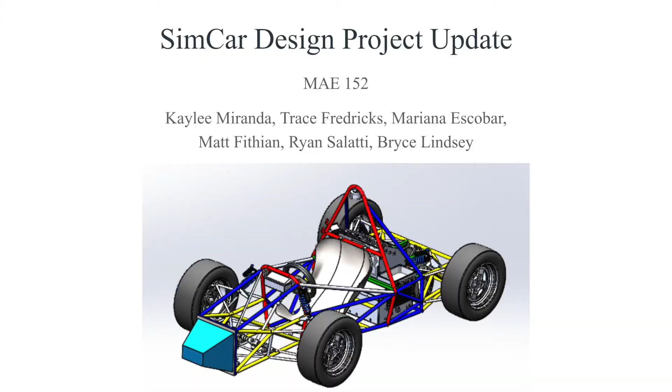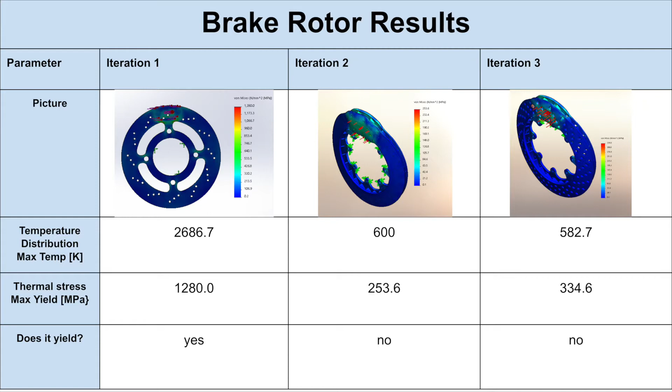The impact attenuator is mounted on the front of the car to absorb energy in the event of a collision. For the purposes of a race car, we want the attenuator to yield for large decelerations above 3 Gs, but not for small ones, all while being as light as possible. It is mounted with a strong adhesive to a plate that has a much higher stiffness, and so will be modeled with a fixed geometry on the mounting face.

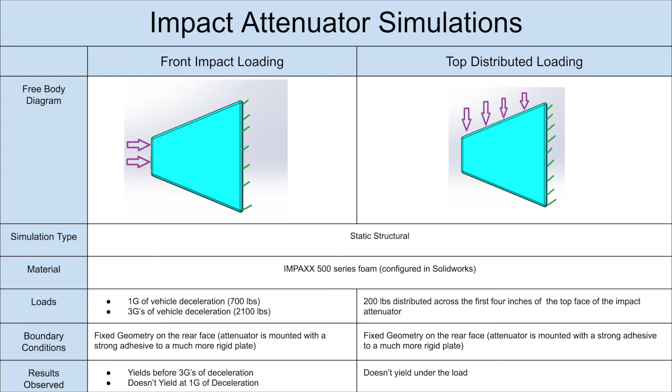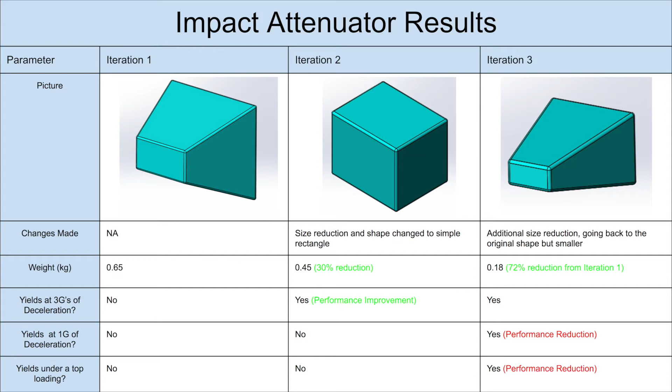The first iteration was overbuilt, meeting the performance requirements, but was heavier than needed. Our second iteration reduced weight by 30% while still performing as needed, but upon removing more weight, we saw that the impact attenuator would yield under too little acceleration.

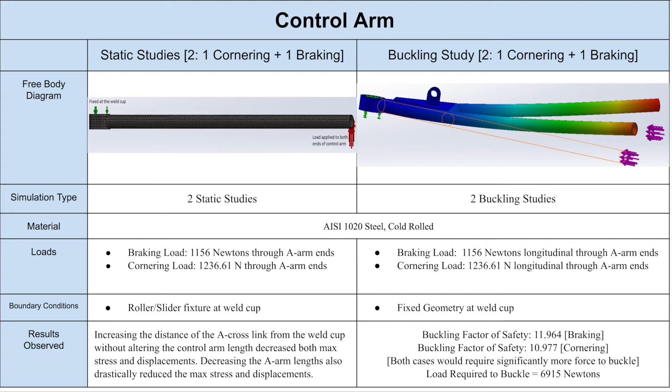The control arm is designed to connect each wheel to the chassis of the car. Control arms are used to transfer the force exerted on the wheels into the shocks to smoothen the ride and keep all 4 wheels on the ground. There were a total of 4 simulations conducted, 2 static studies and 2 buckling studies. The simulations were designed to mimic the effects of both braking and cornering on the lower front control arms.

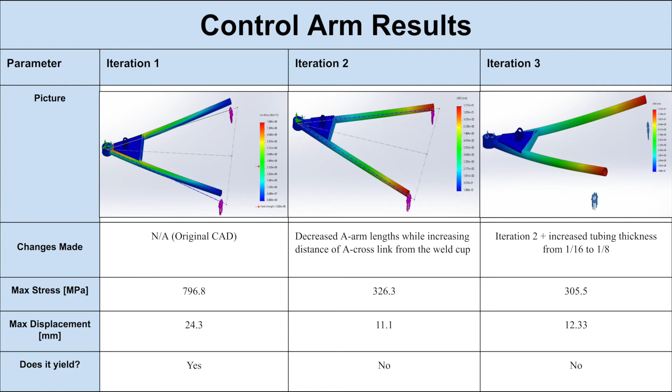The material is AISI 1020 cold rolled steel that will transfer longitudinal forces from the road, cornering forces generated when undergoing a turn, and vertical forces from suspending the chassis in the air through both the shock and the tire.

The chassis is the main structure of the vehicle. This part is heavily triangulated, which helps to direct forces toward the nodes, which are welded meetings of steel tubing with very high strength. The intent of this design was to reduce stress built up throughout the chassis. I ran several simulations to determine optimal locations for added triangulating members. This also helped me make a change to the material.

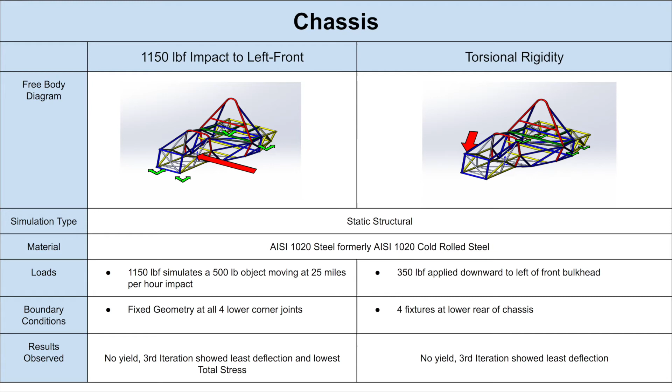The presented cases show an 1150 pound force, which models a 500 pound object impacting the chassis at 25 miles per hour. The first iteration yielded when considering axial and bending stress. The second iteration included 3 new triangulated members, which drastically reduced axial and bending stress buildup and deflection. The third adds 1 more member that further reduces stress and deflection, as well as a material change that showed improved results.

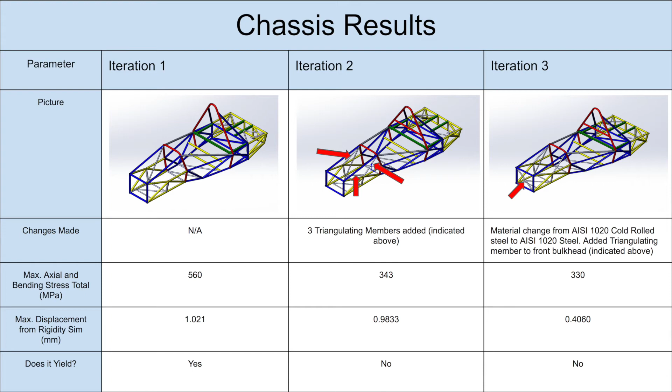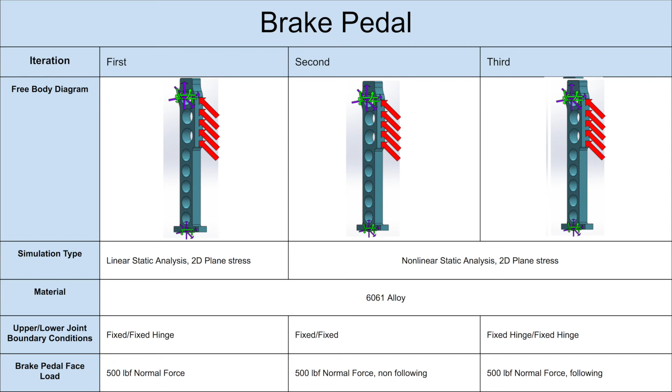The brake pedal translates force applied by the driver into hydraulic pressure generated by the master cylinders. In an emergency stop, a maximum normal force of 500 pounds is applied to the fully extended pedal. This is modeled as being rigidly fixed at both ends with applied load in between. The pedal is a thin model, loaded and restrained in plane, and can be modeled with 2D simplification plane stress elements. A nonlinear static analysis will result in the most representative analysis, as the fixed pedal stiffness may increase as it is deformed. The first iteration does not yield and has an FOS of 1.98.

To reduce weight, the diameters of the material cutouts were increased by 37.5%. This resulted in a 23.5% decrease in weight, but a FOS of 0.752. To account for these discrepancies, the cutouts were increased by 20% and were slotted. This resulted in a 28% decrease in weight and a FOS of 1.17.

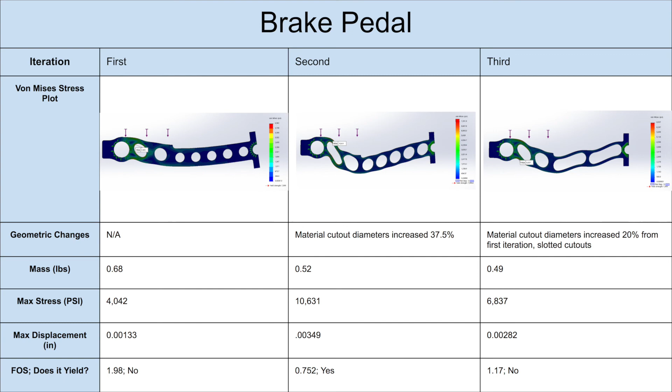The chassis tabs are used to attach various components to the car. For these simulations, I am focusing on the tabs that mount the battery box. This load is approximated as a 110 pound force. I loaded the tab in 2 different ways, with the force parallel to the face of the tab and normal to the face of the tab. The normal force was more significant.

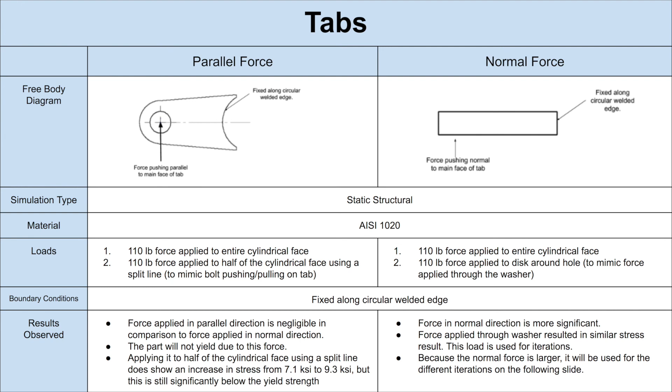For the normal force, the first iteration yielded. For the second iteration, I made the tab thicker and the part did not yield, but the tab was heavier. For the third iteration, I added a wedge to the tab and the part did not yield and it was not as heavy as the second iteration.